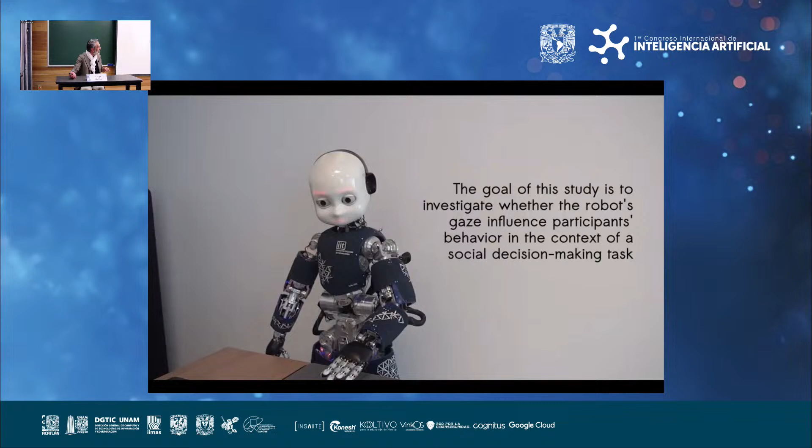Here, the video shows exactly how the experiment is done. The robot actually presses the button to deviate. It does all of this - of course it's not strictly needed, but this makes it completely realistic, and you play the game for a long time.

Now what happens? Well, there are interesting aspects here too. Also in this case, there's reaction time, response time, and you can see that first of all, there's no difference on average between when the robot is more social versus less social. So there's always an effect because the two colors are indeed different, but it doesn't depend on the personality, so to speak, of the robot - a robot that is more social doesn't change the effect.

But when there's mutual gaze, indeed you're slower than in the case when there's no mutual gaze. So a robot that is antisocial is better for you, and you're faster in responding. There's also a way to check that on the EEG.

The way it works with EEG is that you do the measurements, then you look across the literature to see whether differences, like in this case during task execution, are correlated with activation in areas that have been related or already connected with certain effects. In this case, there's a particular zone you see in blue there, which is known to be related to the necessity to suppress the stimulus. In this case, we hypothesize it's the robot - having to process the information coming from the robot.

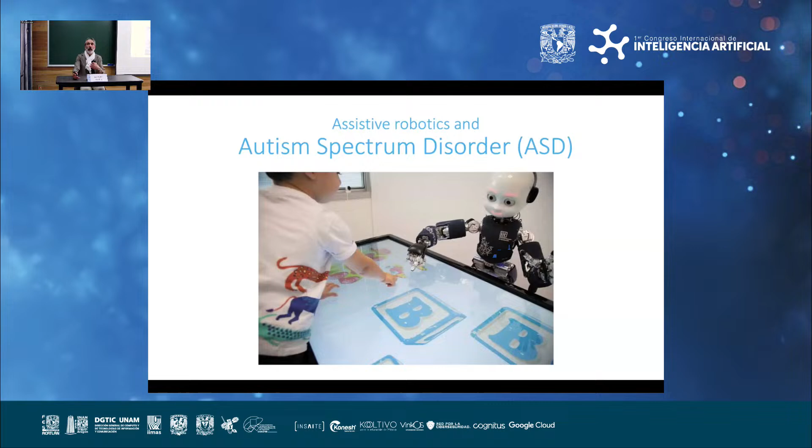We thought of using the robot because, at least in the literature, there were a few examples where there were hints that this may be helpful. In particular, to train kids diagnosed with ASD across a battery of experiments, and train them to behave correctly in certain conditions, in certain interaction scenarios.

Eventually what we did was to prepare a full-blown experiment. We brought the robot to a school, an institute where the kids get teaching, they have normal sessions with physiotherapists, but also they had the opportunity to play with the robot for a certain number of hours. This is how the experiment was set up.

You see that we needed a glass, or a plastic plexiglass wall, separating the kids from the robot. This is for safety reasons. The robot is not certified. We cannot have it interact directly with kids - very, very dangerous in that case.

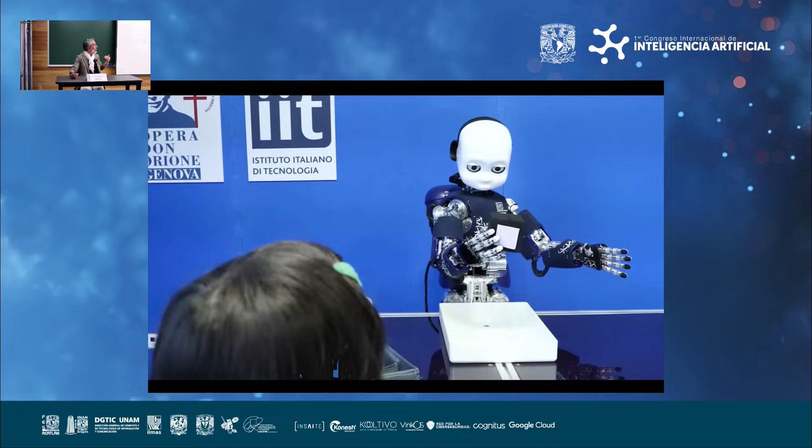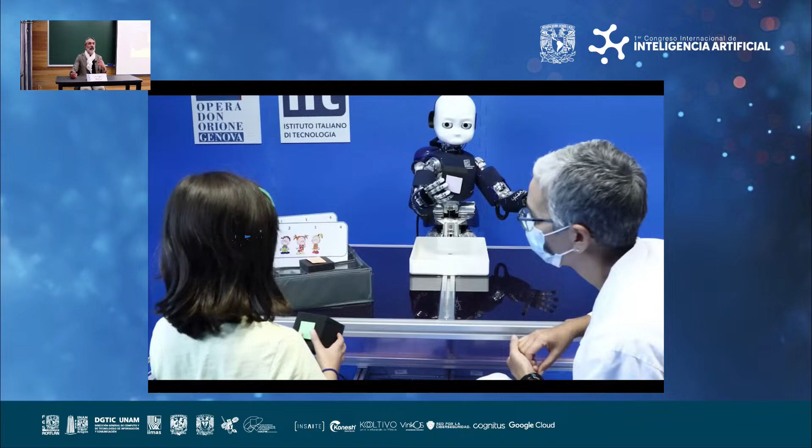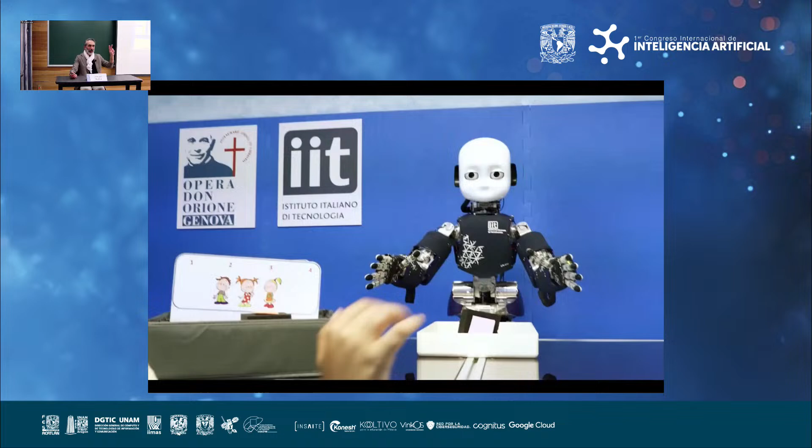This is a video that shows some of the experiments, what the robot does. Basically, what we were training kids to do was perspective taking, in this first experiment. The cubes have different faces with different stickers. You can build a game where you're basically asking the kid to tell you what the robot is perceiving, what is the point of view of the robot - so in a sense, putting himself or herself in the robot's shoes and trying to get feedback from the interaction with the robot. So the robot can say yes, all good, or say no, it was wrong, and so forth.

After the kids play for several months with the iCub. Besides, they were all super excited to be playing with the humanoid robot. Needless to say, this is also part of the therapy, probably.

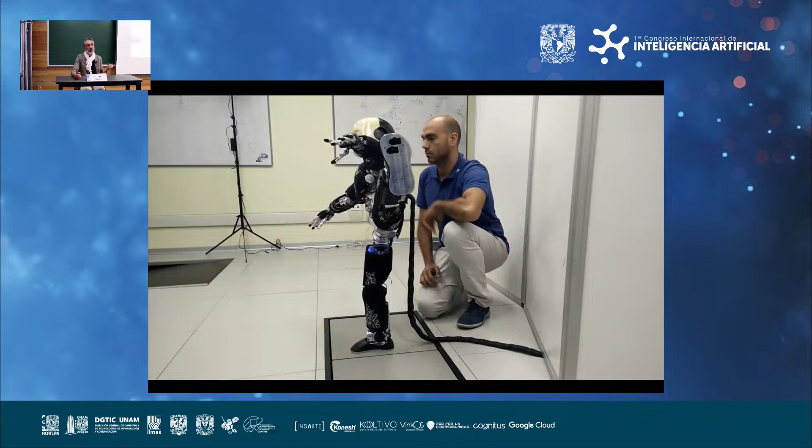This is the first video just to show you some of the capacity of the robot. Of course, when we talk about physical interaction, we had to be able to do things like this one. So the robot is force controlled, and it measures interactions through tactile sensors and the force torque sensors that I mentioned earlier. Therefore, you can push it around, and the robot is reactive enough and can balance, like in this case.

Now, details: the robot runs a multi-layer controller. The lowest level is a QP optimal controller that integrates all the data coming from the sensors and generates control according to a low-level task. There are two more layers - one that uses an approximate model for giving the robot the ability to balance and walk, and then there's yet another model, even simpler, that does the foot placement. The robot decides where to put the feet at every cycle.

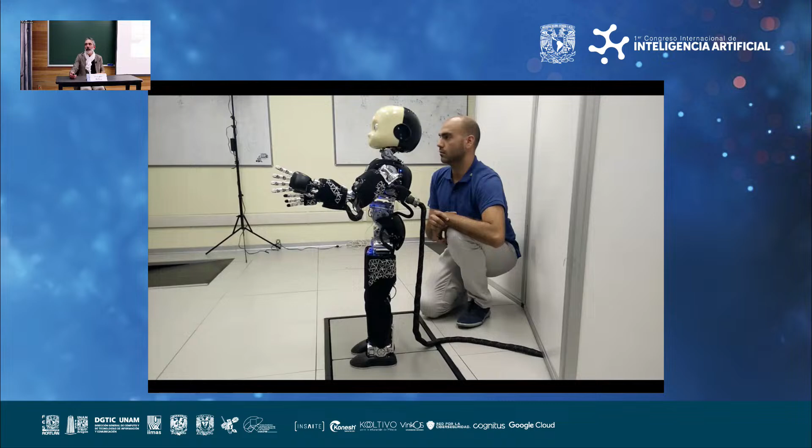And again, the three layers are integrated one after the other. So the foot placement is commanding the balancing controller and the walking controller, which is commanding the QP controller that eventually commands each single motor of the robot.

Now, in these experiments, we also decided to gather more information from humans, and I'll get to that in a moment, why this may be useful. We designed a sensorized suit to measure roughly the kinematics of the person, and additionally we designed a pair of sensorized shoes to measure forces, exchange of forces with the ground. Therefore, we can use that measurement to at least roughly calculate what may be the stresses on the various joints of the person.

This is an example of how it works, and I think it does a decent job, both the sensorized suit and also the shoes. I'll show you in a moment a better representation that includes the shoes. The shoes, by the way, have force torque sensors, IMUs, temperature sensors, and they're completely wireless - that's an added value, you can just wear them and get the numbers.

This is a video where one of our students is playing with devices, lifting weights, and you see that there's a measurement of forces, but there's also measurements of the muscle articular stresses at the joints.

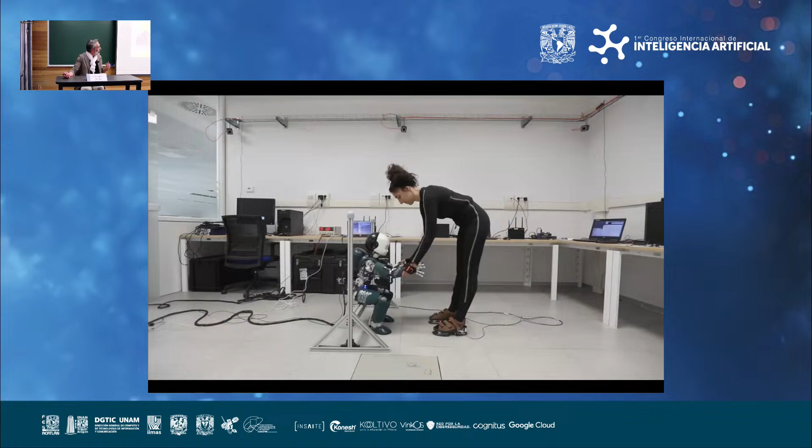Now, let's work with the robot, this is an example. It's difficult to perceive the quality, but the person is not making any effort. It's just touching the robot and lifting a little bit, and the robot knows the articulatory stresses on the person, and therefore the robot itself is finalizing the movement properly.

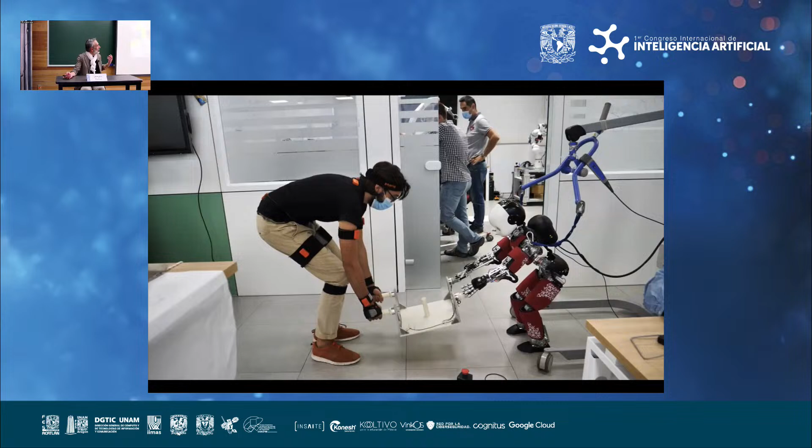This is another case where you can interpose an object, like a box with a certain weight, between the robot and the person. Again, you can build a controller on the robot that takes into account the fact that you have a weight to be lifted, and figures out the optimal controller for the person to minimize articulatory stresses. I'm not entering into the details of this experiment because the complication of the controller is fairly high here.

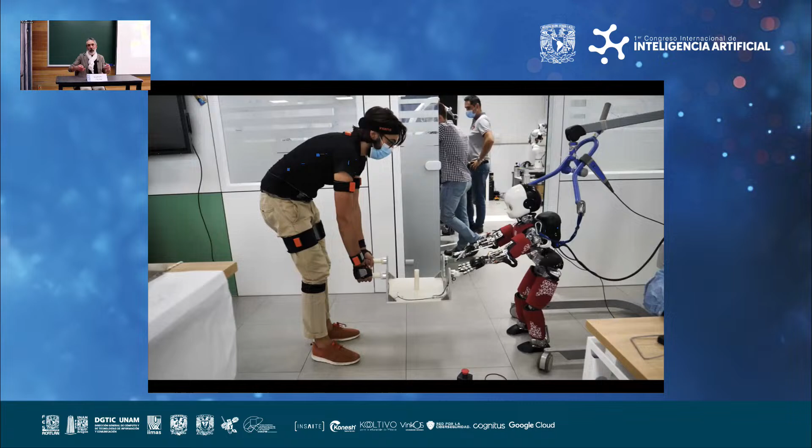Because there's this continuous exchange of forces, but basically we model the person like a robot. We have the complete model, and we model the dynamics of the object where the forces are exchanged, and then we try to optimize the entire thing, which is complicated, but entirely feasible in real time, as the robot is moving in real time.

We also made it so the robot can do the same experiment with another robot, because you have exactly the same controller. It's entirely modular. Everything is modeled with rigid body dynamics, and you can plug these components together and create new controllers.

Now, there's another thing that we can optimize, and apologize for this one, but I'll tell you the story. You can these days parameterize everything about the robot - the size, the masses, the length, everything that makes the body of the robot - and you can optimize also for the shape of the robot.

So what we've done in those tasks where there's collaborative weightlifting, we went to optimize the size of the robot. And you say, okay, but the iCub is a given size, you cannot change it. Sure, but we can design a new robot. That was the idea, and in fact, we then moved to optimizing that big functional that takes into account all the parameters of the robot.

Still maintaining a humanoid with legs, arms, hands, etc., but going through an optimization that eventually will figure out the best possible robot. And the best possible robot was this one, slightly taller, slightly heavier iCub in a sense. Same technology, so joints are a bit bigger, but they're the same.

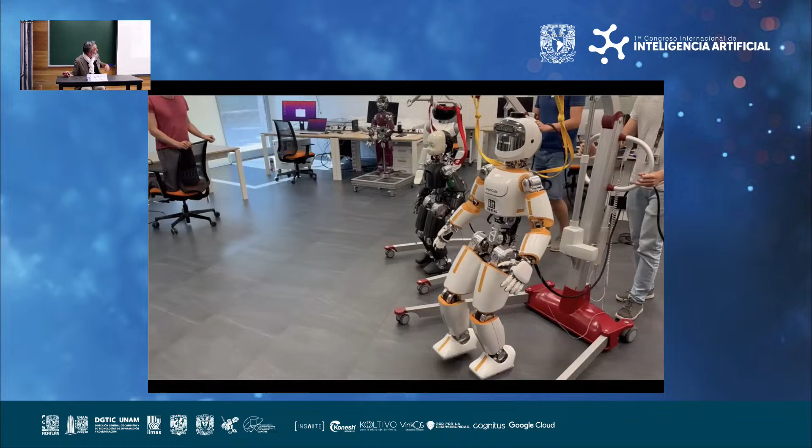And this is basically what we do in these days. You can see an older iCub and the new one walking here. It's, I mean, just a presentation of the robot - a grown-up version, not very, very different otherwise.

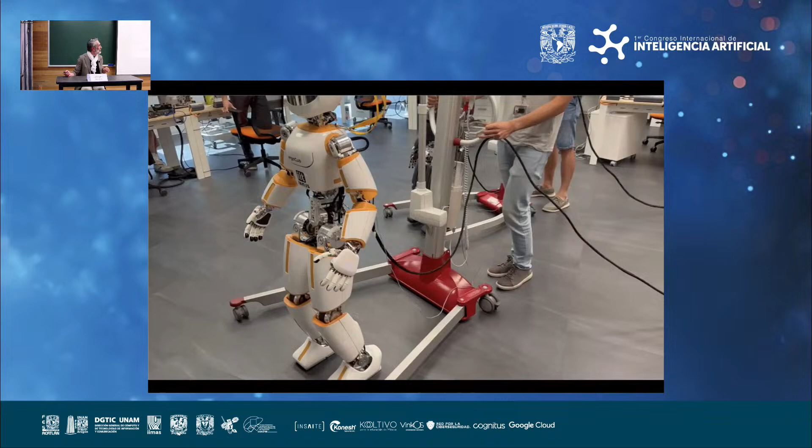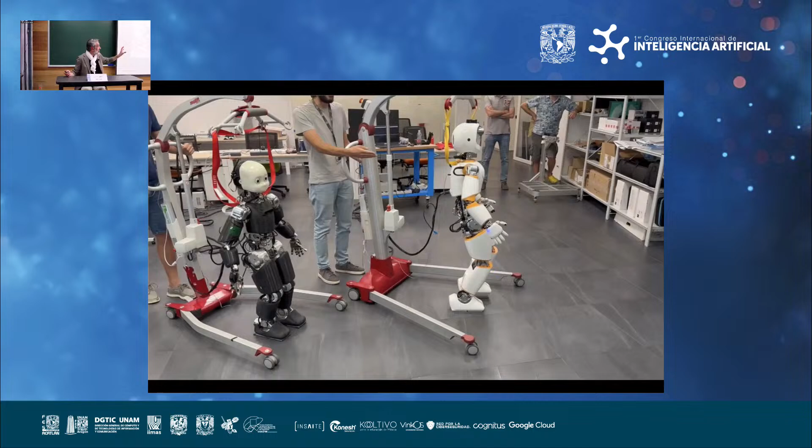What you can also see is that from this robot, we can now start building complicated behaviors. And these days, though, the complicated behaviors can also be learned.

And now, the sensorized suit that we design becomes the way you train the robot. In fact, you can train from running teleoperation with the sensorized suit. So the same suit, the shoes that I mentioned, they're all data collection points, a means to actually collect data about what the person is doing. And if you teleoperate the robot, you can collect the same numbers from the robot. Therefore, you can have the person teaching the robot how to go through a task.

And just since we're in the time of deep learning, you can plug all these numbers into a big neural network, which is basically what we've done. It was fairly easy to actually do it, in the sense that you just need a bit of GPUs and design a neural network that included images, but also depth, but also movement. And in this case, there was also a speech interface. And the result is something like this one.